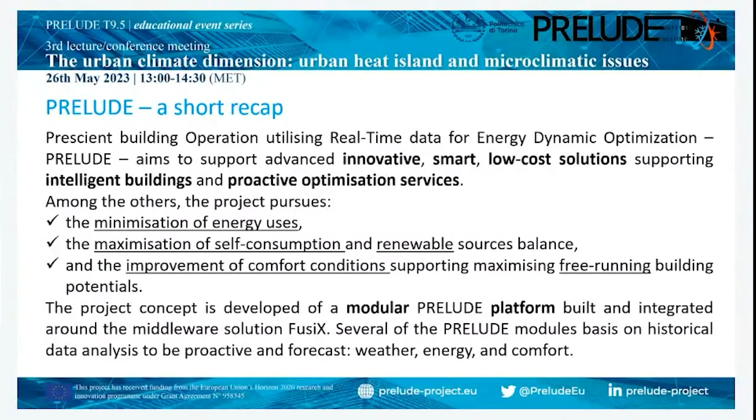Inside the project, a modular platform has been developed with a series of different tools and solutions connected to a shared middleware. Among the proposed technologies, we can mention the integration of all data connected to the project, both simulation, monitoring, and elaboration, inside a single middleware.

There's the dynamic free-running potential exploitation with a new EnergyPlus and monitoring data interface, called PREDICE, developed at POLITO, and the outdoor-indoor correlation model, supported by Brunel University.

There's a prediction model for weather, irradiation, and building energy forecasted requirements, developed by companies inside the project. Occupancy profiling and advanced profiling methodology using different types of machine learning, provided by the FB Research Lab in Austria. District heating integration model supporting the integration of buildings within smart grids.

And green and energy communities, renovation roadmaps through simplified and advanced tools for architects, comfort and energy efficiency optimization connected together, monitoring, optimization and control of equipment in buildings, predictive maintenance, measurement and verification approaches with machine learning, and so on.

These modules are under test now in different demo cases, from Denmark to Italy, from Switzerland to Poland, Greece, and including a very advanced smart building living lab in Austria.

But if we go to the event of today, which is part of this educational conference series, what does today's event focus on? It opens discussion on free-running and low energy buildings, and the topic of the urban dimension. We always know that the urban dimension changes, we can say, the domain, or at least the boundary conditions in which we apply bioclimatic, low energy technologies and solutions.

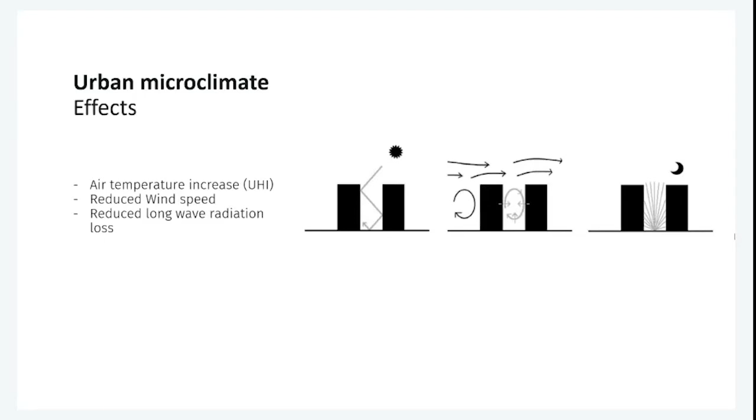Which, of course, decreases the ventilation potential of buildings. Another effect is the fact that we have reduced sky view factors of the roads and the facades, which basically slow down the cooling process during nighttime for long wave radiation loss. So we have a modification of air temperature, wind speed, and surface temperatures in cities.

This effect determines an overall increase of the energy demand of buildings, because in the literature it's quite common to all the studies that even if we have a saving in the heating demand, the increase of the cooling demand determined by this urban effect is more relevant. So overall, buildings in dense urban context have a higher energy demand than outside the city.

And generally, we can say that the increase of the cooling demand is around 20% compared to the same building outside the city. But of course, this depends a lot on the climate, on the building, on the texture. So this is just an average result of the literature. Then every case is different.

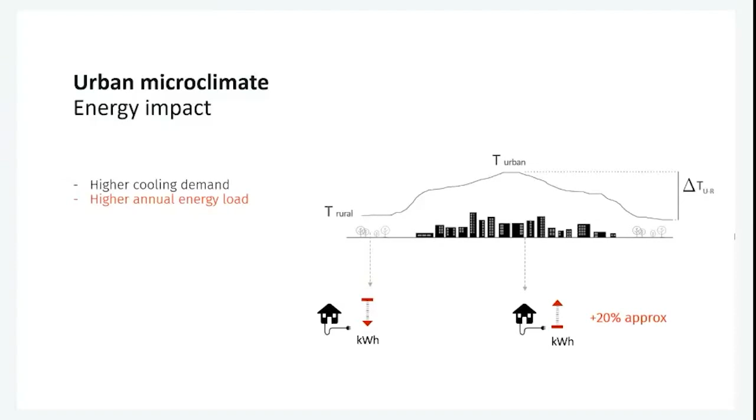So we have these urban effects that determine an increase of energy demand of buildings in different climates. And on top of this, we have climate change. We know that the climate is changing, and it is changing toward higher average air temperatures. So we have, on average, higher temperatures that also have an impact on the energy consumption of buildings, especially the cooling demand. And we also have more frequent extreme events like heat waves that have impact on buildings, but of course are even more concerning for health-related risks for the population.

But if we think that we have this average increase in air temperature combined with the heat island effect and the other urban microclimate effects, it is clear that urban microclimate is actually amplifying the negative effect of climate change in cities. So when we analyze the performance of buildings under climate change scenarios, we also must be aware that on top of that, we also have these microclimate effects.

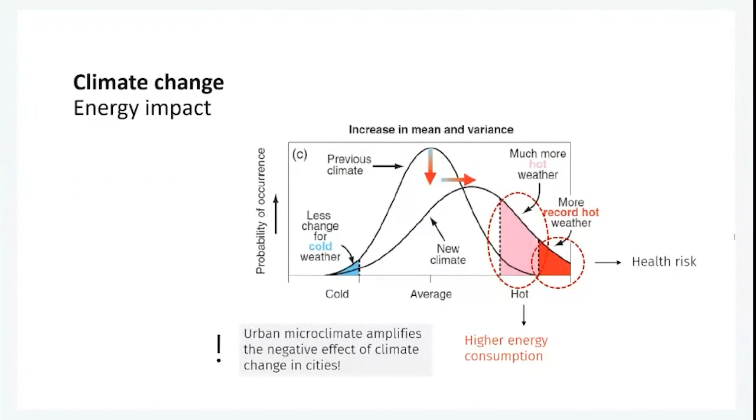And this is what we have tried to analyze in a previous European project, the RECO2ST project, in which I worked when I was postdoc at Brunel University. So the studies that I'm going to present are basically results and methodology developed for the RECO2ST project, and specifically for one task that was devoted to assess the resilience of renovation solutions for buildings, the resilience of these to the impact of climate change and urban environments.

So these are research activities carried out at Brunel University with Maria Kolokotroni, who was the PI of the RECO2ST project, and who is also involved in the PRELUDE project. So it's a good thing for PRELUDE to have this expertise inside.

In the RECO2ST project, there were different demo buildings, and we focused on two of them, one located in London and one located in Cadiz in Spain, to analyze this combined effect of microclimate and climate change, because they were representative of very different conditions in terms of climate region. Of course, in London we have a humid, temperate climate, while in Cadiz we have a hotter Mediterranean climate.

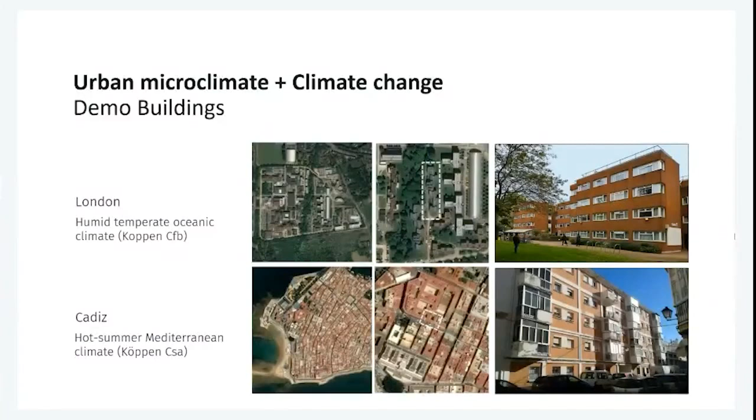So it was interesting to analyze how these different boundary conditions affected the performance of renovation technologies applied to these buildings. Okay, so the first thing that we did to analyze this combined effect was to develop a methodology to include the urban heat island intensity in future weather files.

So in order to run simulations using future weather files that were also including urban effects, we used the urban weather generator tool, which is an urban canopy model that has been developed exactly to include this heat island effect into weather files to run building performance simulation. And we forced this urban weather generator using future weather file data, in this case generated by Meteonorm.

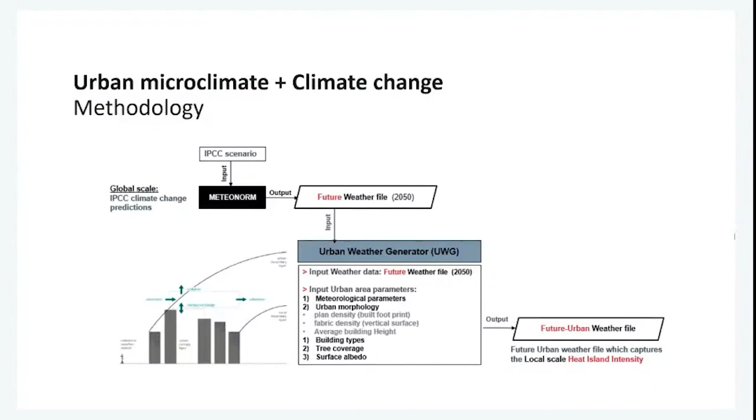So we generated a future weather file from Meteonorm, and we used this to force the Urban Weather Generator, obtaining a future urban weather file. In this graph, we can see results of the change in mean air temperature determined by climate change and heat island effect in these two cities and different contexts. The yellow part of the bar represents the increase of temperature determined by climate change, and the red part represents the further increase determined by the heat island effect.

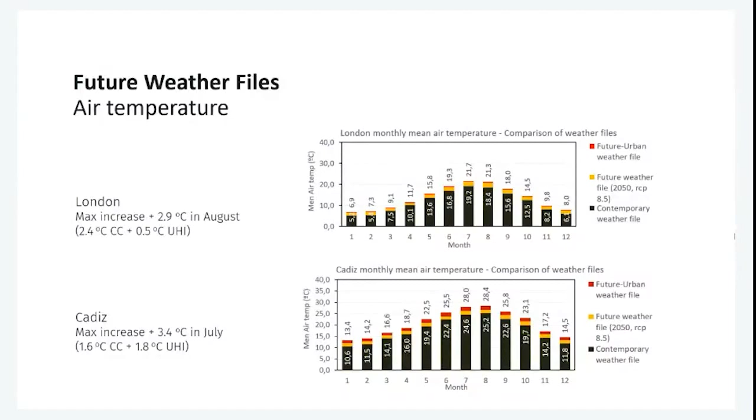You can see that in Cadiz, the graph on the bottom, the heat island effect is as high as the increase of air temperature determined by climate change, so it is very important to consider both effects. While in London, in that specific location, the heat island effect was lower and the impact of climate change was more significant on mean air temperatures.

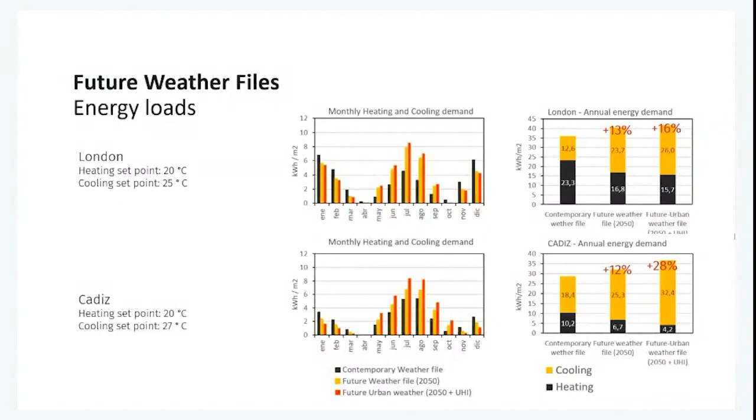As a result, if we analyze how this increase in temperature affects the cooling and heating demand of these two buildings, you can see on the graphs on the right side a comparison using a contemporary weather file, a future weather file, and a future weather file including the heat island effect. It is clear that the cooling demand is increasing more than the decrease of the heating demand. Overall, we expect a significant increase in annual energy demand in both climates, up to 16% in London and up to 28% in Cadiz.

The results are similar if we analyze free-running buildings. So instead of analyzing energy demand, we just analyze the free-running building and see what happens to the indoor operative temperature under these future urban scenarios. We can see results for different rooms of the buildings analyzed in London and Cadiz, showing an increase in the percentage of time that the building is above the adaptive temperatures, even considering the upper limit.

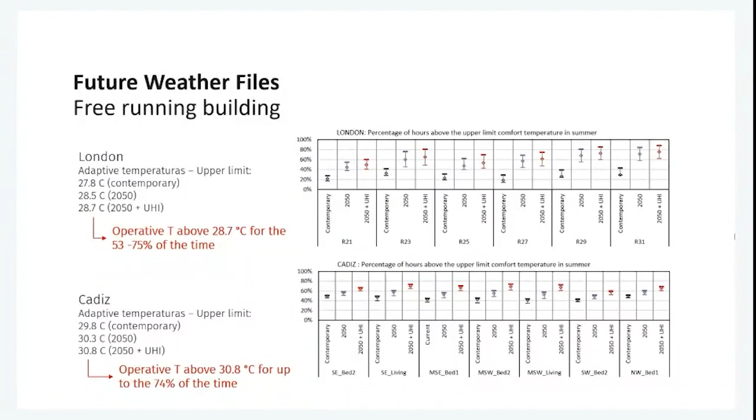In both cases, climate change plus heat island effect will determine very uncomfortable conditions, like 75% of the time the buildings are above 28.7 degrees in London or above 30.8 degrees in Cadiz. In Cadiz, for instance, the increase determined by heat island effect is even higher than the increase in discomfort determined by climate change. So this again underlines that it's really important to consider both effects.

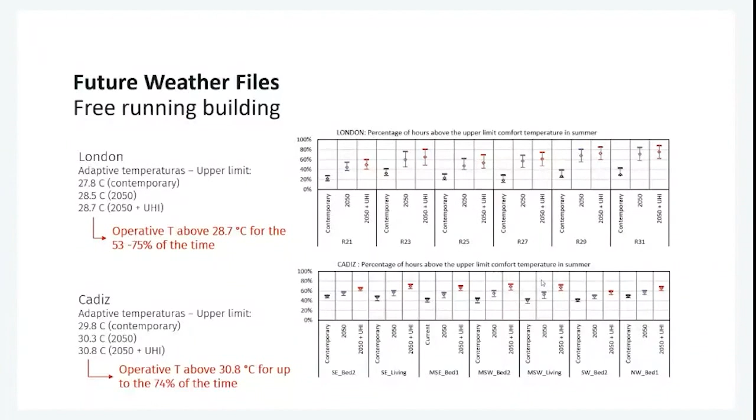Finally, there are also other microclimate effects that cannot be included in weather files. In weather files, we can modify the air temperature according to the heat island effect and run simulations to take this into account. But we cannot take into account the impact of the actual spatial distribution of wind speed and direction around the building and the surface temperature. So in order to assess the further impact of these microclimate phenomena, happening at a very small scale around the building, we used ENVI-met.

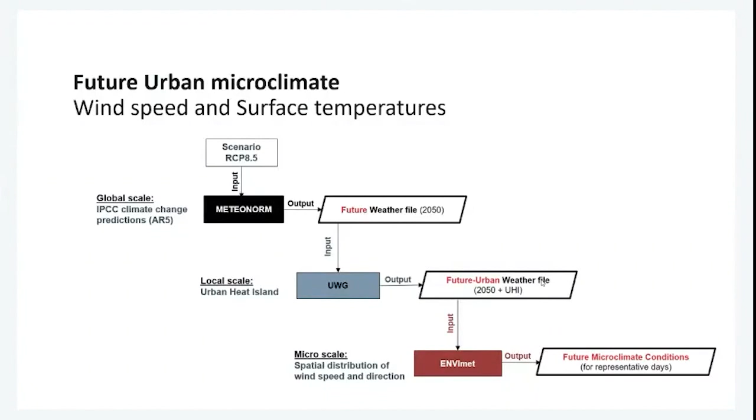Even more clear is the impact of the built environment on wind speed in the case of Cadiz. The building in Cadiz was located in a very narrow urban canyon, in a very dense urban texture, so the wind speed is definitely reduced compared to an open field or undisturbed field.

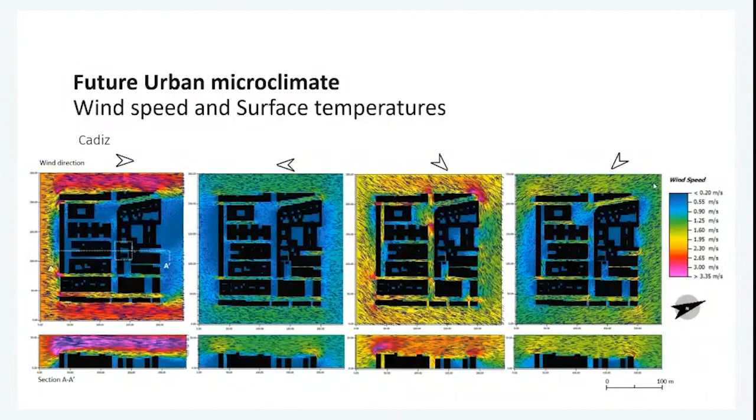To check the impact of this wind speed reduction on the ventilation rates of the buildings, we used the ENVI-met outputs to force EnergyPlus. We used the wind speeds calculated by ENVI-met as input to the external nodes of the airflow network model, which is the model used in EnergyPlus to calculate ventilation rates, in order to adjust the wind pressures at the different facades and obtain more realistic ventilation rates.

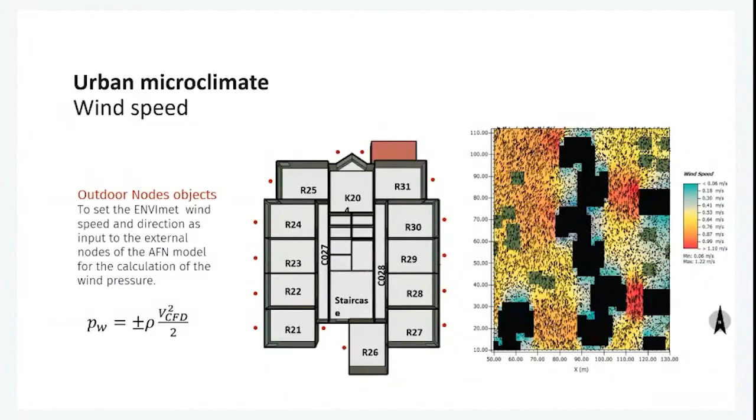And the other effect that we checked using outputs from ENVIMET was the impact of actual surface temperatures on the long wave radiation exchange of the building. This was done just for the building in Cadiz because it was really close to the facing building, and we wanted to check if we use the actual surface temperature of this facing building and the view factor of the studied building to the facing one, how much this could affect the heat loss through long wave radiation of the building. We did so again using outputs of ENVIMET and the object in EnergyPlus called the surrounding surface object that can be used for this purpose.

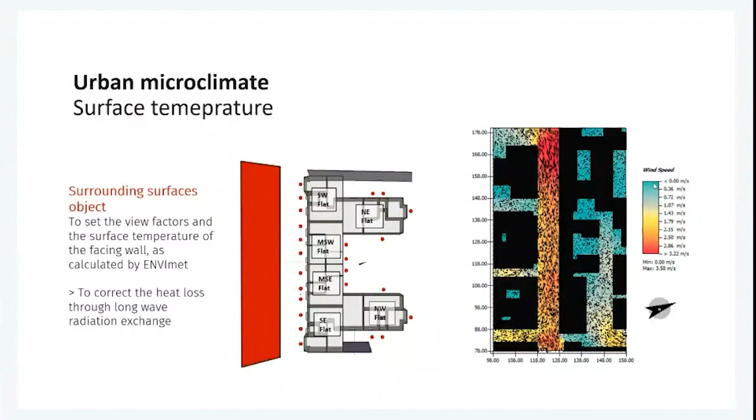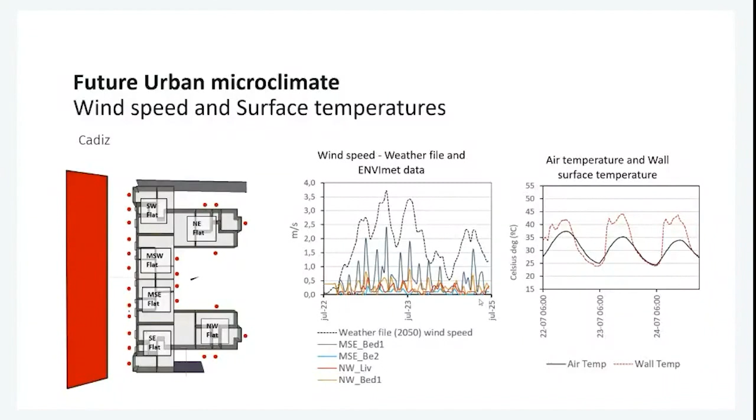Just to show some results for the building in Cadiz, in the first graph on the left, you can see that the wind speed on the facades of, for example, two of the flats analyzed is much lower than the wind speed as calculated by EnergyPlus for the ventilation calculation. So it is important also to understand that when we run simulation in EnergyPlus, not considering these actual wind speed values, we may have results that are not realistic. Now we will see how much is the difference. Also on the right side, you can see the difference between the surface temperature in red as calculated by ENVIMET compared to the air temperature, which is the basic assumption made by EnergyPlus also for surfaces.

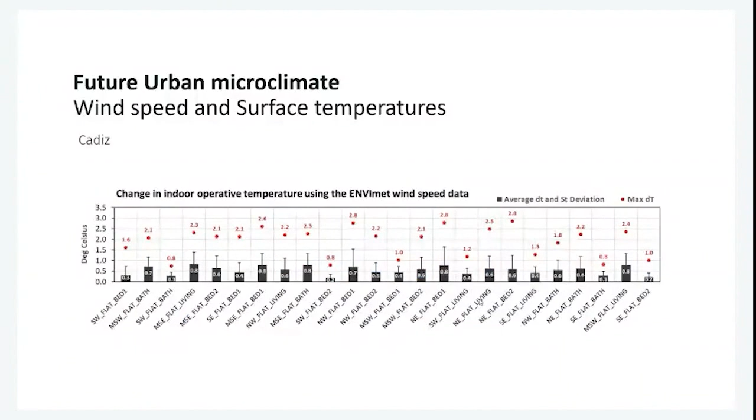On the other hand, in this graph, we can see that the other effect, the decrease of long wave radiation rate due to higher surface temperature in cities, has a lower impact. The yellow bar represents the impact of using actual surface temperature in the prediction of the indoor operative temperature, compared to the gray bar that is when we neglect this effect. In this case, the impact is no more than 0.3 degrees, so probably it is not so important, or less relevant, we can say, than urban wind data.

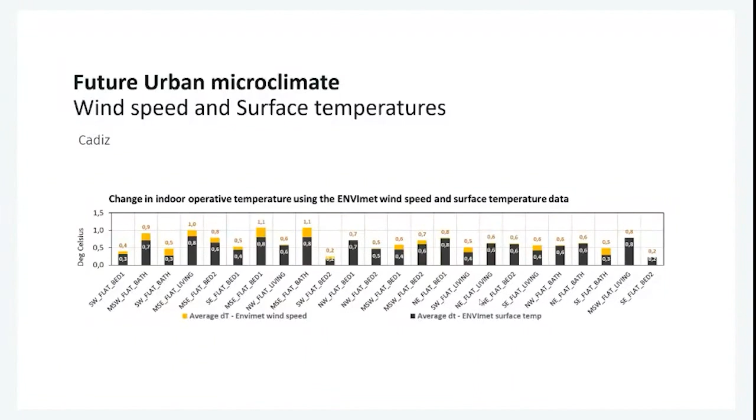Okay, so now I wanted to just show another study that is more focused on, another time again, generating future urban weather files. But in this case, we wanted to show the different impact that the same building can have depending on a different location across the city. This is another work that we developed for the RICOS project, and we presented at the Building Simulation Conference in 2021. We developed a methodology to include global and local climate modification in weather files, considering a building located in different locations across a city. Now I will show why this is important.

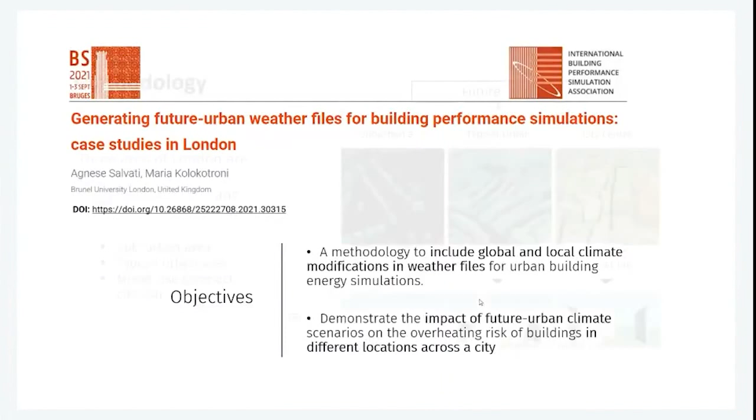So we used London as a case study, and we chose 3 locations that were representative of London: a low-density suburban area, a typical urban area of London with medium density and row houses, and the city center, which is much denser. For these 3 areas, we developed an EnergyPlus model, considering that the building in these 3 areas will be affected in different ways by the proximity to other buildings, especially in terms of solar gains and in terms of heat island effect, because the heat island effect, the higher temperature increase in cities, will be more relevant in the denser city center than the suburban area.

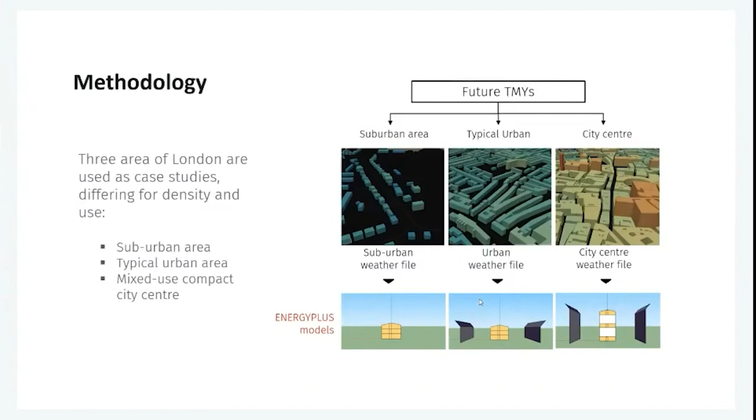So in this case, we developed a methodology similar to the previous one, but using other source data for the future climate. We generated future typical meteorological years using more detailed, high-resolution regional climate model data for the future prediction, so the future predictions are more detailed than the previous study. And similar to the previous one, we included the urban effects using the urban weather generator.

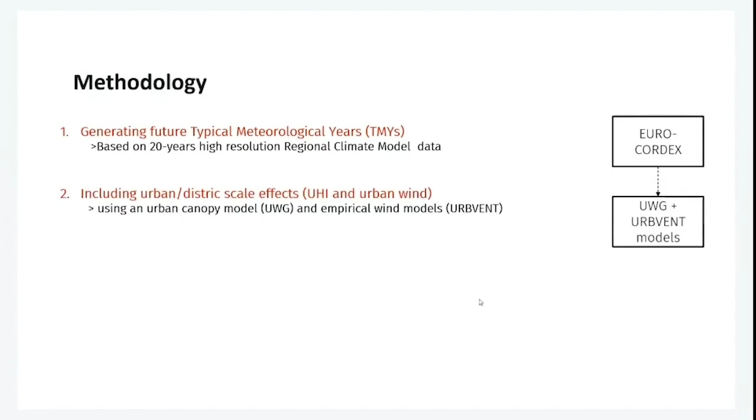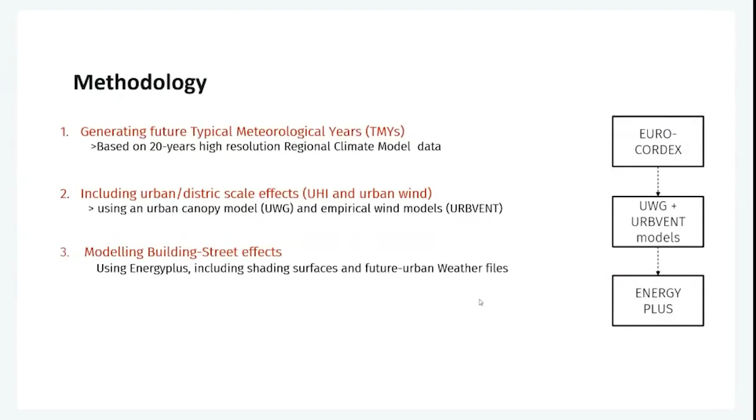And finally, we use this weather file to assess the overheating risk of the buildings in these 3 contexts, considering shading surfaces in Energy Plus to take into account the different geometries of the urban context.

The future predictions are more detailed in this study. We can see that in the future mid-term and long-term, so 2050 and 2090 in London, we have a significant increase of air temperature, but something we could not see with the other method is that, according to some models, we can expect a reduction of the global horizontal radiation. This also has an impact on building energy performance.

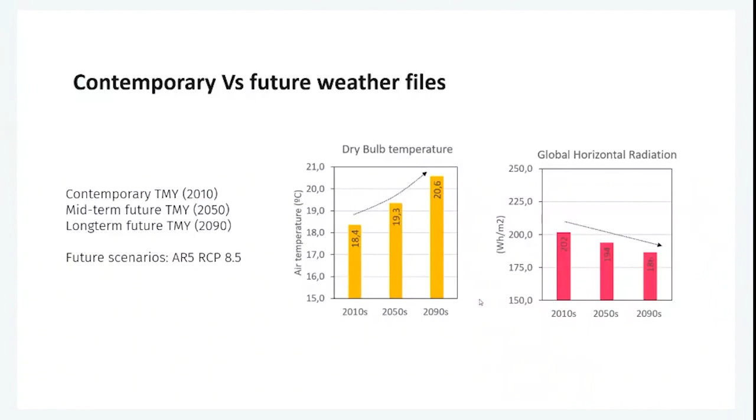Due to this reduction of solar radiation in the future, we do not expect an increase of the heat island effect. We actually can predict a slight decrease of heat island effect in the future period, assuming the city is not changing. The heat island effect is always adding to the climate change air temperature increase, but we are not expecting an intensification of this phenomenon.

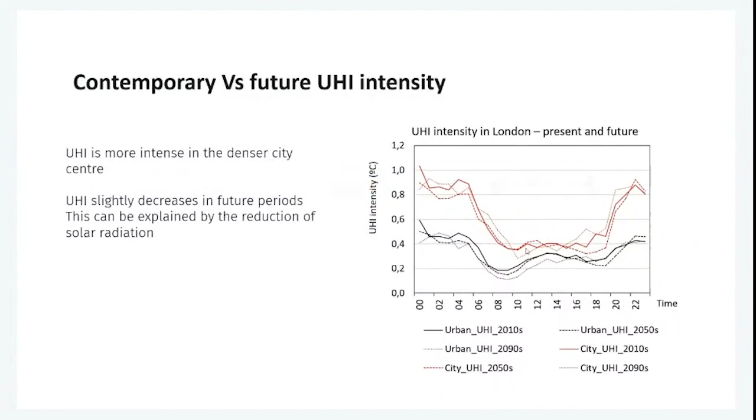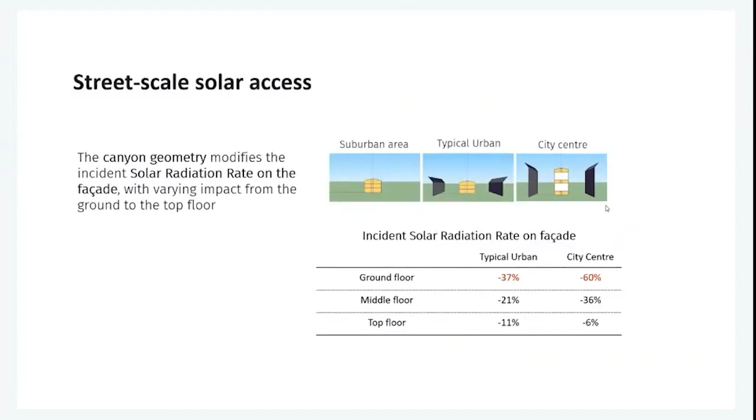So when we combine all these effects - going to the end of the presentation - what happens? If we analyze the ground floor flat, we see that the one located in the city center has a lower discomfort time, a decreased risk of overheating, thanks to the shadows of the surrounding buildings. We do have an increase of discomfort time with climate change, but the urban location has a positive effect on overheating risk.

On the other hand, when we analyze the middle floor, we see that the urban location has a worsening effect on the overheating risk of the building, and the percentage of time the building is in a discomfort condition will increase much more than the ground floor location.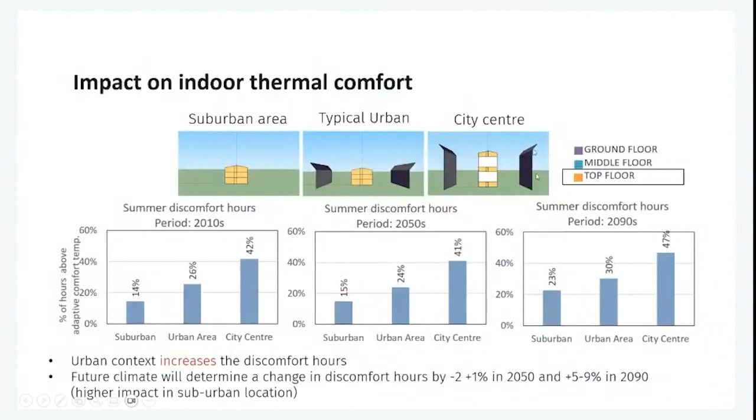In conclusion, we must be aware that the heat island effect in cities generally amplifies the negative effect of climate change on the annual energy load of buildings. So if we talk about energy loads, the heat island effect has a negative impact on top of climate change. But also, in urban areas we have contrasting effects.

On one hand, we have a decrease of wind speed that reduces the ventilation potential of buildings, but on the other hand, we have the positive effect of building shading on cooling demand and thermal comfort in summer. So we must always consider all these effects to understand if the urban context is mitigating or amplifying the overheating risk associated with climate change.

Therefore, we should always perform a multi-scale analysis to understand the relative impact of global, local, and microclimate modifications on buildings. Of course, the final impact also depends on the building itself, its fabric performance, internal gains - this is clear - but this research wanted to show that there are many other variables outside the building that affect its performance.

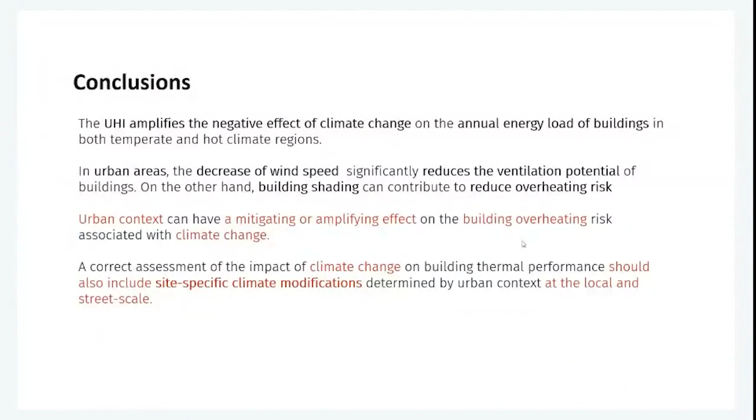And this is it for me. I hope it was interesting.

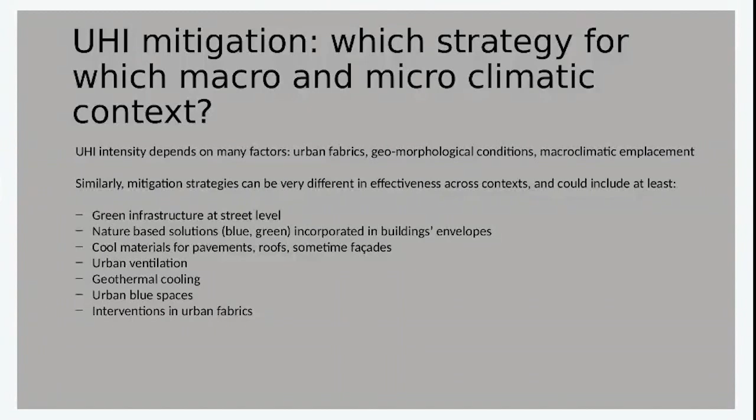At the same time, when we conduct a theoretical analysis to select which intervention to implement, we can use different tools, and probably at a different scale of analysis for the planned intervention, we should use different tools more appropriate to the specific analysis we are running.

Typically, the urban heat island is a whole-city phenomenon, more intense in the city center, as Agnese also showed very well. However, recent studies put in evidence that inside the city there are always some spots present, some hot spots and some cold spots, and maybe in some cases it's very interesting to focus on urban heat island reduction in the hottest spots of the city.

So in this presentation I will show 3 case studies. The first one in Barcelona, Spain. It is a very simple exercise considering green roofs as a mitigation strategy and using the tool InVEST.

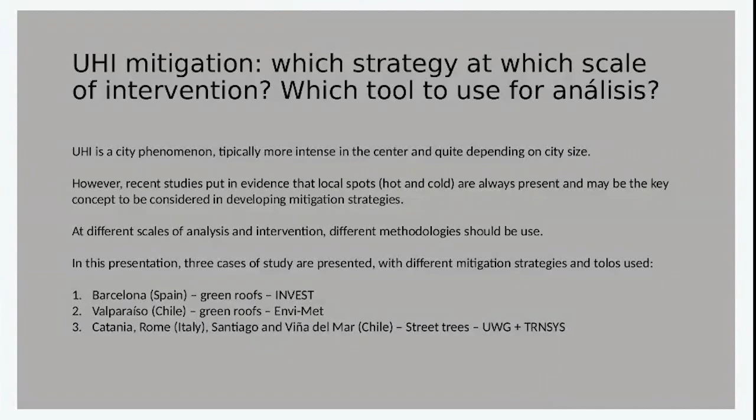All the case studies are located in Mediterranean climate. Mediterranean climates belong to the Köppen classification of temperate climates, typically located among latitudes 30 and 45 in both hemispheres. This includes the Pacific coast of both North and South America, some small zones in South Africa and Australia, and of course all the Mediterranean basin.

Of course, microclimates are quite different among cities like this. From Los Angeles to San Francisco, the climate is changing in a quite consistent way, not to speak of changing between continents. So the idea of Mediterranean climates includes very localized effects that are quite important for the specific intervention we can use.

Moreover, there are differences in urban fabrics. Typically American cities and also Australian cities are more dispersed and sprawled, while the Mediterranean basin typically presents a quite dense and compact city, of course with differences from Algiers to Barcelona or Athens, but with higher densities than in the other continents.

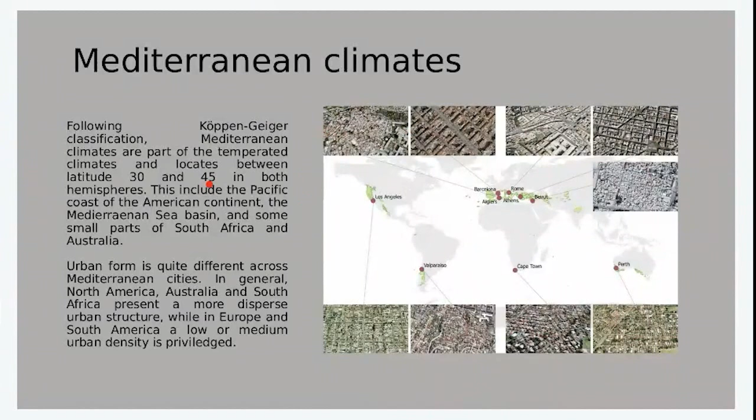So the first case study, a very simple exercise, we use the INVEST tool to check the benefits to implement green roofs on certain sectors of Barcelona city. We selected the sector at the building block level, by the density of people, selecting the denser sectors with more than 0.05 people per square meter.

This is about 20 square meters per person in residential buildings. So we selected Barceloneta, Barcelona Sants, and some parts of Horta i Guinardó as the building blocks to be restored with the implementation of green roofs.

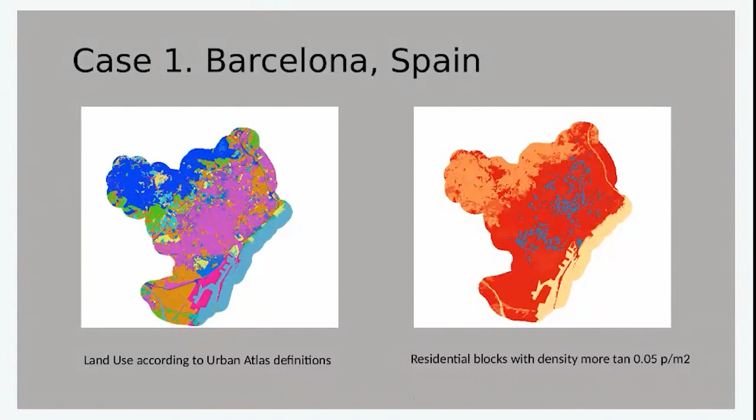In the software INVEST, we chose to change 15% of the roof surface to implement green, and we changed the properties of albedo and evapotranspiration characteristics of the surfaces where we placed the intervention.

We also changed the runoff retention to check if a mitigation strategy like this can also be a multi-risk reduction intervention. INVEST calculates, in a quite simplified manner, a cooling capacity index defined as the local cooling potential with respect to the maximum UHI intensity of the whole city.

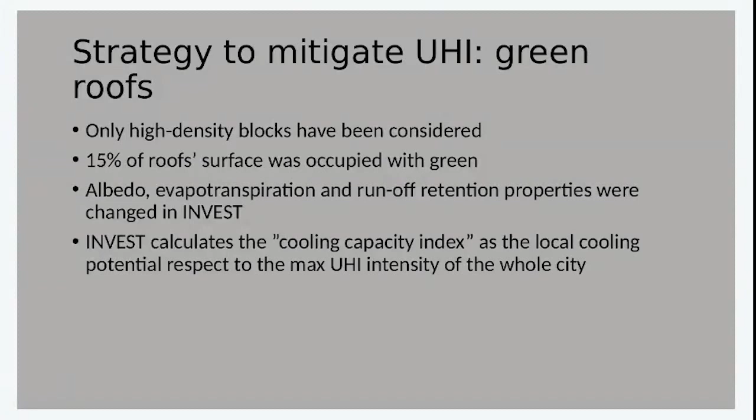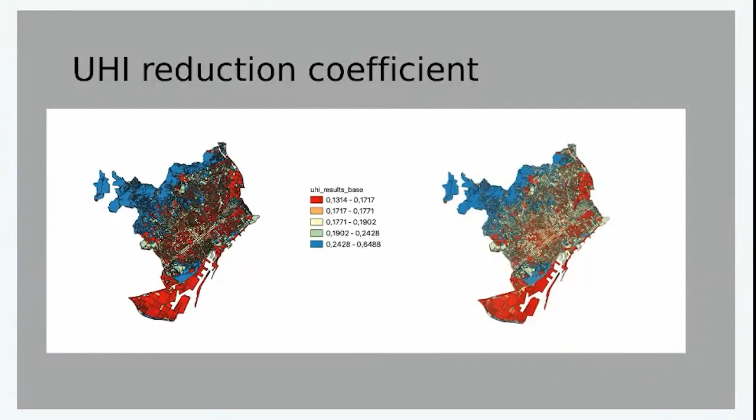The results of the model are as follows. We can visualize that the reduction coefficient for the UHI intensity is changing in all the sectors considered by the analysis. When we look at the numbers, we can see about a 30% increase in the capacity to cool the city when the green roofs are placed.

However, there is almost no global effect. The average UHI intensity for the whole city remains the same. It's just a localized effect in the building blocks and surroundings where the green roofs are placed.

If the mitigation strategy is related to the exposure, to the number of people exposed to the UHI, then of course the cooling capacity increases at the target points. This was the objective of this exercise: to know how much the cooling potential can be increased where it's most needed.

And finally, yes, this is a multi-risk mitigation strategy, because the runoff risk is reduced by about 30% in the target locations.

Of course, there are many limitations in using this tool. INVEST's calculation is very simple, only comparing the surface temperature from satellite images. No ventilation effect is considered, nor is accurate radiation exchange among buildings and facades accounted for, and especially no three-dimensional assessment of urban temperature is done. It's just an analysis of the surfaces.

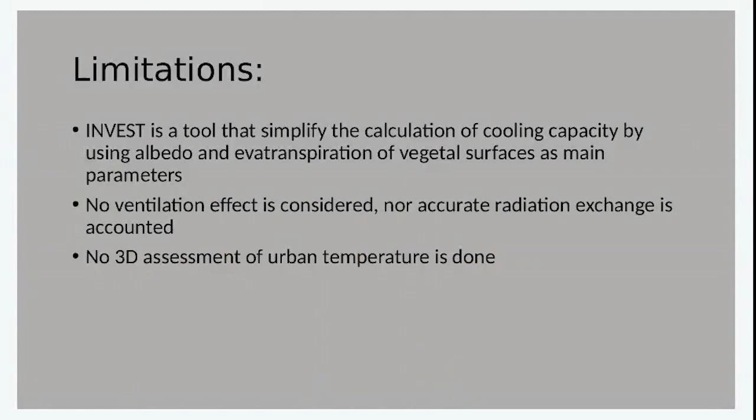So INVEST can be used when we need to check quickly and recommend, for example to urban planners, some sectors to be prioritized in the selection for mitigation strategy, for mitigation interventions.

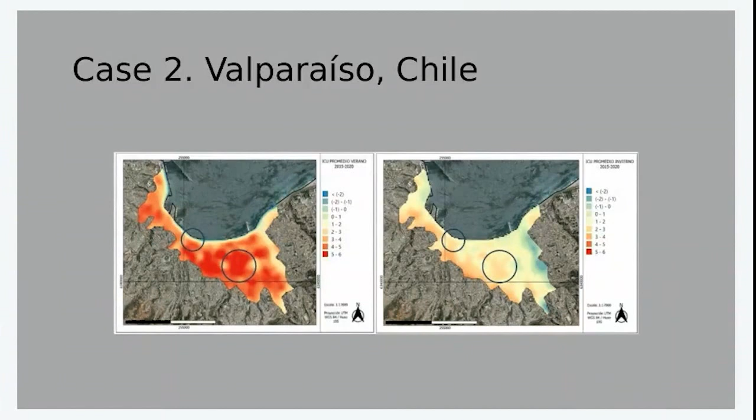The second case is in Valparaíso. In this case, we first used a general urbanization intensity evaluation to select some neighborhoods where we modeled a complete analysis with EnviMet.

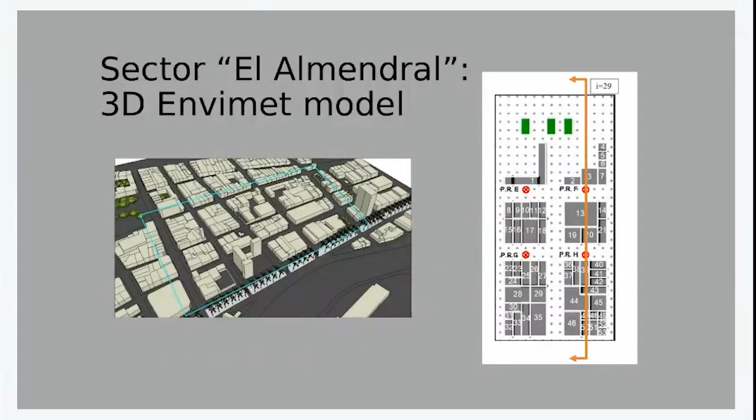In this case, we also checked the strategy of green roofs, varying the percentage of roof surface occupied by green. So we compared the scenario with no green roofs, to using 50% of the surface for green, or using the whole roof surface of the sector with green interventions.

We changed the properties directly in the EnviMet model, and we ran a set of simulations at different hours and different days of the typical year.

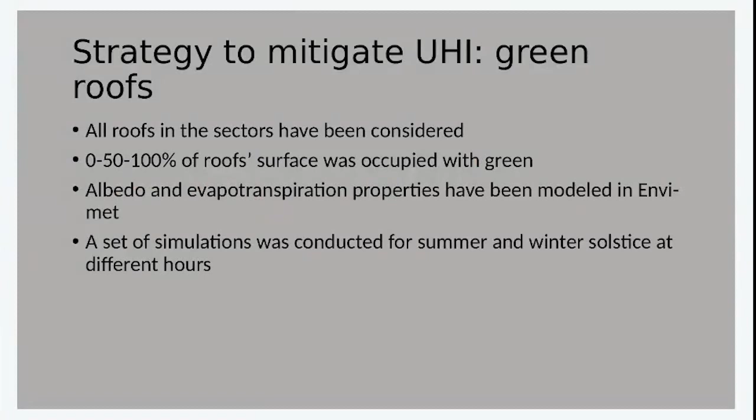So we can use that strategy to mitigate also the urban heat island intensity at the street level.

The idea is to use the combination of air movement and green roofs to try to mitigate also at the street level. We are still researching this; it depends on the type of green we use on the roofs.

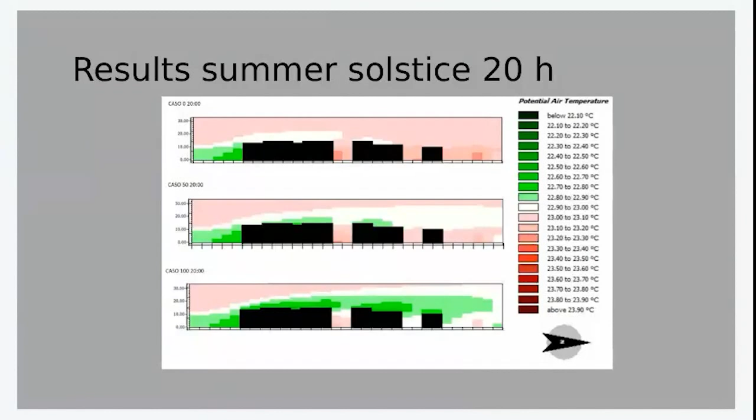In this case, EnviMet is a very complete tool, with calculations much more effective than other tools like INVEST. However, the problem is that it is time-consuming.

We need significant computational power to run the simulations, but we can obtain the vertical profiles for air temperature, allowing more informed and precise decisions to be taken.

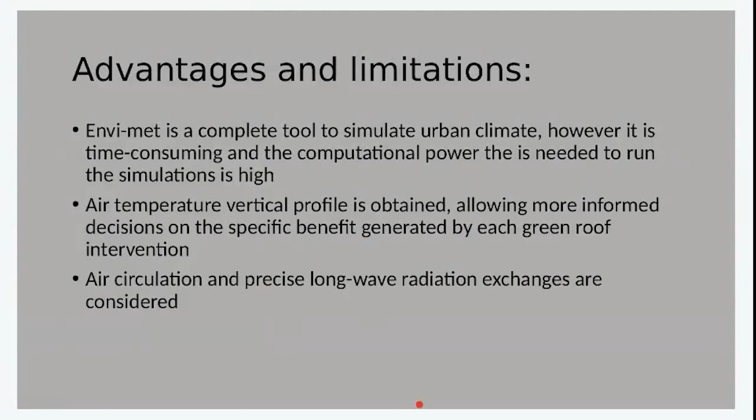The third case I will present is a study on green infrastructure at the street level, planting trees on the street to shade facades and roofs of buildings, and we compare different cities in Mediterranean locations.

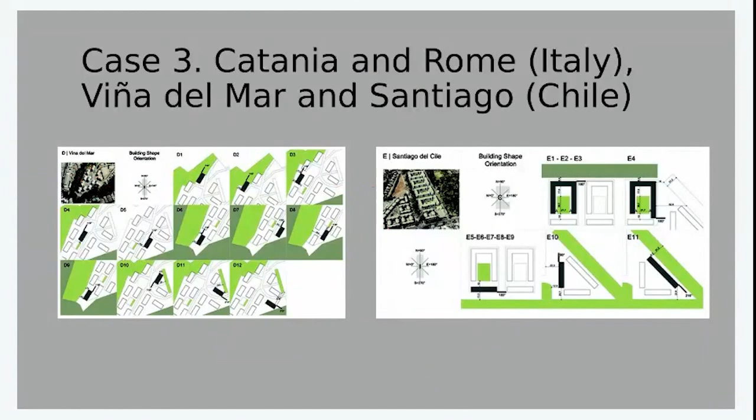We select some neighborhoods in Viña del Mar, in Santiago de Chile, and in 3 locations in Italy: in Catania, and in 2 urban peripheries of Rome, Casale Caletto and Tor Bella Monaca.

We consider in this case the local availability of space to plant the trees. This is quite important because in general there are many studies considering isolated buildings, flying without the urban context, placing trees to check the effect of shadows and other effects like evapotranspiration and wind modifications, but just very theoretically, putting trees all around the building without considering a real context.

So in this case, there was a study that we did with researchers from urban planning departments in Catania, in Rome, and here in Chile. We decided to consider real conditions, so the green intervention was done where there is the possibility to do it, and this is changing, of course, from one case to another. Each configuration was conformed by an existing building with some characteristics, form, materials, etc., and the availability of space where to put the trees, so the distance from the facade, for example, changes from Catania to Rome in each case.

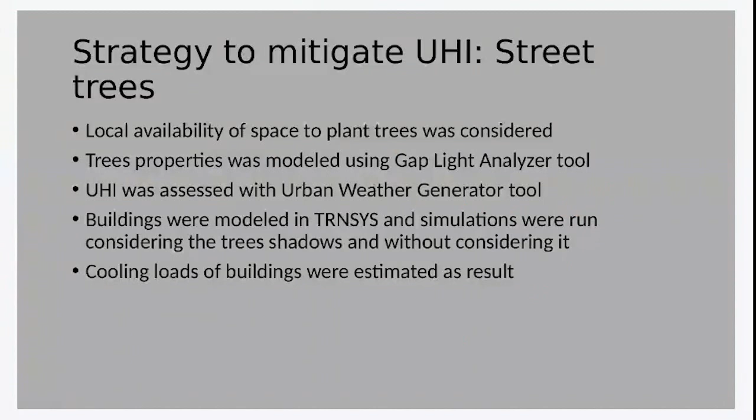Buildings were grouped in categories, basically very similar to the Tabula project building categories. We divided them into 4 groups based on size and form of the plant floor. So we decided to group the buildings into C-shaped buildings, T-shaped buildings, and L and I-shaped buildings.

Materials properties used were the same for all the cases. This is a slight approximation because materials used in Chile are sometimes different from building materials used in Italy, but we selected not to change the values, to not introduce noise in the simulation results. We also used the same operation settings for all the cases: light gains, cooling set points, occupancy of people, and the management of solar shading simulated as an ideal user that is opening and closing blinds depending on the penetration of solar radiation.

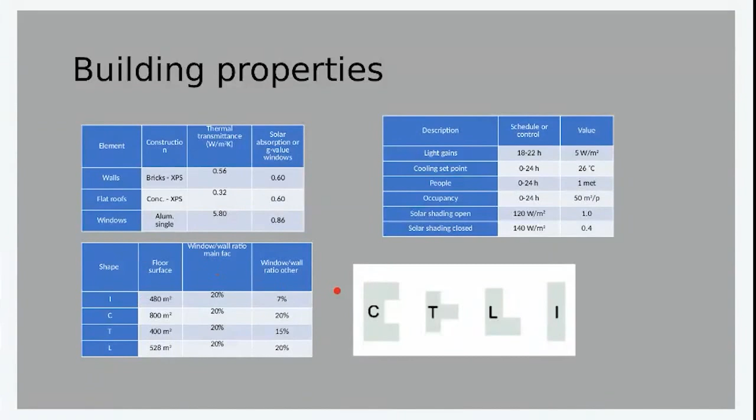The building shape determines the window-to-wall ratio, and there are some shapes with more exposed windows to the sun than others. The trees are modeled with shadow angles that permit radiation on the building facades, and in some cases, in the Pinus case, basically affect only the roof. We modeled the solar permeability with the gap light analyzer for 3 types of trees, 3 species: the Pinus, Platanus orientalis, and the Ficus benjamina.

Coming to the results, we see that the cooling load reductions using green infrastructure on all available space around the buildings, for these 120 configurations we analyzed, are in a quite variable range, from 5% to almost 50% of cooling needs reduction. The reduction in cooling needs is higher in percentage when the initial base case need was lower; this is quite typical, when you have lower needs, the intervention is in percentage more effective. But there are many cases with important reductions of 30-40% in cooling loads, especially using the pines, the species that with the umbrella effect is more effective to shade, especially the last floor and the roof of the building.

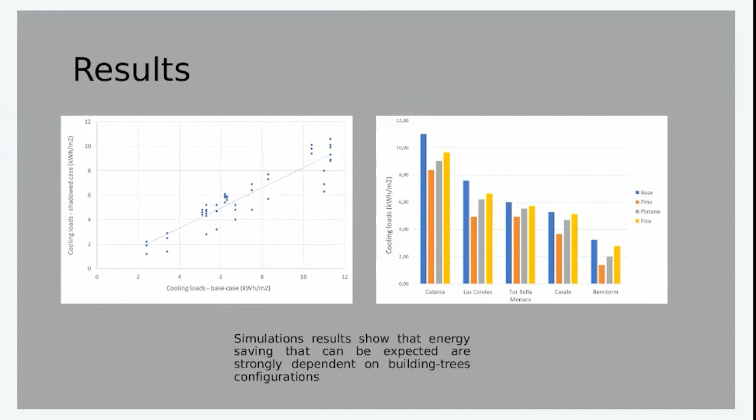So, as a conclusion and for establishing future work and important decisions to take now, we can say that green infrastructure interventions are always very important to reduce local UHI intensity, not only in Mediterranean climates, but especially in Mediterranean climates. Benefits should be accounted at different scales, using the tool most effective for the scale of analysis, which may be very useful to communicate the general improvements to stakeholders.

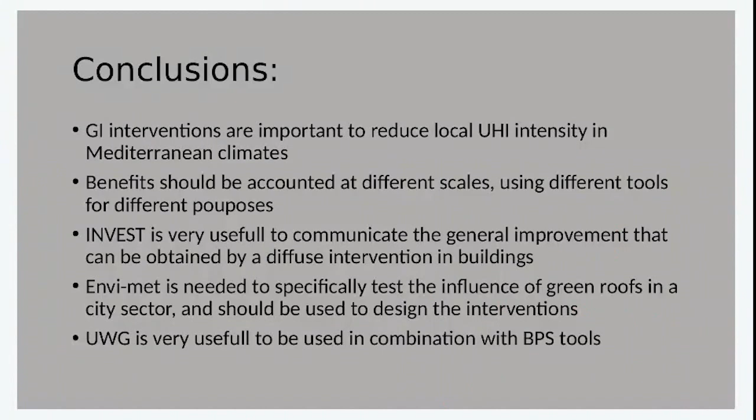Envi-met is needed to specifically test the influence of some specific intervention at the building and surrounding levels, and urban weather generator is maybe the most useful tool to be used in combination with building performance simulation tools. But we have open questions and other parameters we have to add to our studies.

For example, other factors affect a global evaluation of the mitigation strategy. When we use green infrastructure, especially, we have the use of water for irrigation to be accounted. In the case of trees, maybe we need more water for irrigation than in the case of green roofs or green facades, where we can use more controlled irrigation systems.

Very important is the capacity of stakeholders to take a decision quickly. Imagine you are working as an urban planner at the municipality and you have to decide which part of the street should be dedicated to trees, select the species, look at the distance from the facades of buildings, and also consider another boundary condition, for example, the continuity of the green infrastructure to be used by people to move or for bicycles, etc.

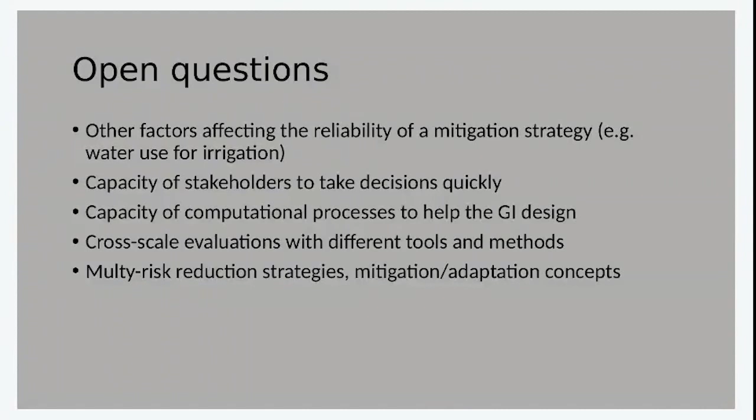Just as a little idea for future studies, we are developing a machine learning study to help urban planners take decisions. For example, we can run a certain number of simulations of these configurations, considering buildings and surroundings with or without green infrastructure interventions, and then check if the machine is able to estimate the final energy convenience of having the green infrastructure, based on the learning process from the previously run simulations. So, is the machine able to generalize our study?

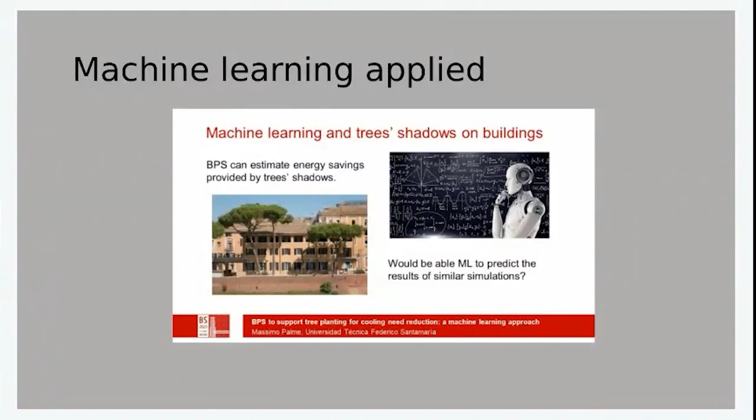We checked this for the 120 simulations we did in Mediterranean climates, asking the machine to classify, in a supervised manner, if the cooling loads are reduced by the green infrastructure in less than 5%, between 5 and 15, between 15 and 25, between 25 and 35, or more than 35%. The target objective was maybe to reduce the cooling load by more than 35%.

We saw that with a mix of different algorithms—especially we used random forest, LOS, KNN neighbors, and GLM—with the ensemble of these algorithms we obtained quite a good result, and we have a positive recognition by the machine in 75% of the cases, correctly assigned in the 5-category classification strategy.

When we used only 2 categories—more or less than 50% cooling load reduction—the accuracy of the machine learning was 95%. So it's really very accurate to determine if the energy load will be reduced by more than 50% or not, and this is very good information for stakeholders who have to decide whether to put trees in a street, shadowing the facade of buildings or not. Of course, the arbitrary value of 50% can be changed; we can use 20% or another value.

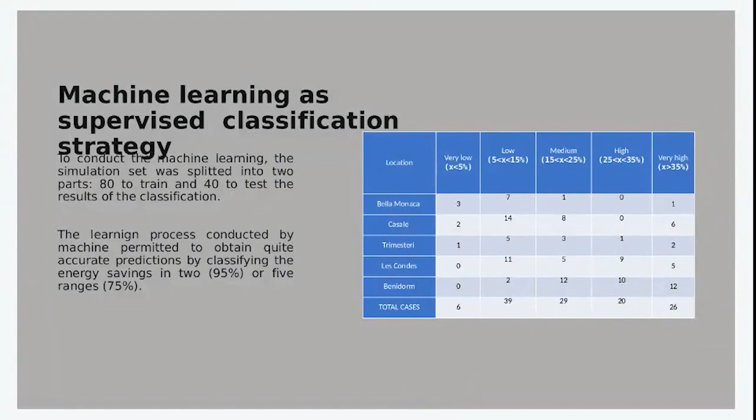Of course, until now we focused only on Mediterranean climates. We should check this kind of computational learning strategy in more situations, considering climate variability that may reduce the accuracy of the predictions. But this is one of the open questions for research, and I think you can be interested in it. Finally, some references on previously published work on these topics, quite recently, between 2020 and 2022. Thank you very much.